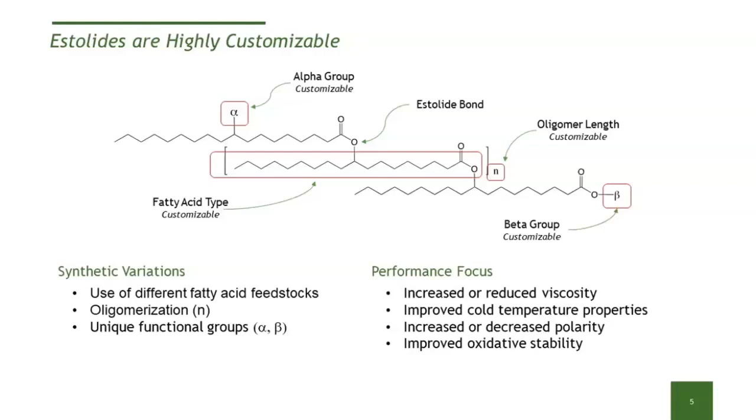So one thing we do want to think, though, is I know we're talking a lot today about lubricants, but we really view this estolide technology as a platform. We've actually developed products using our BT base oils in a number of applications, carriers and adjuvants in agriculture. Our low viscosity products we're working on as a plasticizer in plastics. Obviously, we'll talk a lot today about lubricants and the lubricant industry. We've used the BT estolide technology to replace process oils in tires and saw very good cold weather and winter type properties in those tires.

We have HX1 certification for non-food contact. We've also researched being able to use them as emulsifiers in food. And we have a personal care division that's exploring use in cosmetics, skin creams, hand creams, lotions, due to its good emolliency. And so what's nice about this is it's a platform that can leverage the technology across a wide array of industries.

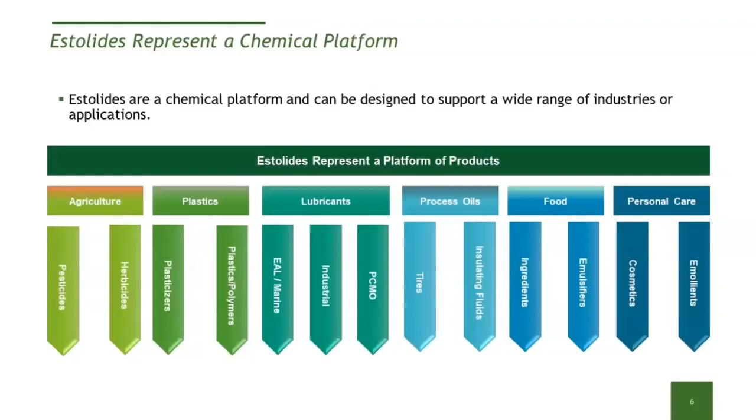The other thing we like to talk about is we have a great IP portfolio, with the focus of really protecting our customers. We want to make sure our customers are free to use our technology without a concern of being blocked by some other patent or technology. So we have patented all the way from the original raw material sources all the way down to in-product application. So the raw materials you're using, the technology, the proprietary catalysts, the processing of that, and then the end formulations. We've got about 71 patents that have been issued so that you can really operate with freedom for any of the work you're doing with our estolide technology.

So today we're talking about the base oil components for Estolides. We have three current key product offerings. We call them BT4, BT22, and BT75. This is essentially their viscosity, so from a thin material to a thick material. All have very good bio-based content. Our lowest is 68% with the BT4, all the way up to 94% with the BT75.

The reason for the change in the bio content is we're capping right now with an alcohol that's non-bio-based to improve hydrolytic stability overall. So the bigger the molecule gets, the more bio-based content, which is why the 75, which is roughly 12 to 15 chains of our fatty acid glued together, has the best bio-based content.

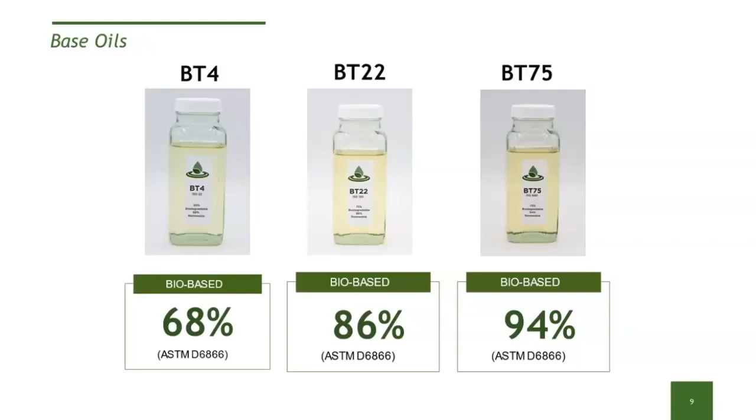Here's the general physical properties of our base oils. You can see it's roughly an ISO 22 for the lowest viscosity up to about an ISO 680 for the 75. These materials are fully blendable with each other. They're a very solvent molecule, which we'll show further in the presentation. What that means is you can easily blend the BT4 and the BT22 for ISO grades, like a 46 for a hydraulic fluid, or if you need an ISO 220 gear oil, the BT22 and the BT75 would be a perfect blend. So really you can blend to any needed viscosity from ISO 22 up to ISO 680.

Very good viscosity index for these products, almost 200 for the BT75. Our pour points for this version are usually in the minus 18 to minus 21 region. Very high flash points, very stable molecules under temperature, 240 minimum up to 270 we're usually seeing from batch to batch. We start with very low acid numbers, once again with a focus on hydrolytic stability. You have good colors, usually 1 or less for D1500 on the 4 and the 22, and usually 2 or less, and we've even had close to 1 on the BT75 as well.

One other thing to point out is that the BT4, which is a very thin material, has a very good NOACK. It's not very volatile, so if volatility is an issue in your application, the BT4 is a good choice. So John, I saw your comment there. We have worked with pour point depressants with this technology. I'll show you some of the data in our finished formulations. In general, we see okay response, maybe 3, 4, 5 degrees, but we don't see the type of response you might see with, say, group 1, 2, or 3 technology at this point.

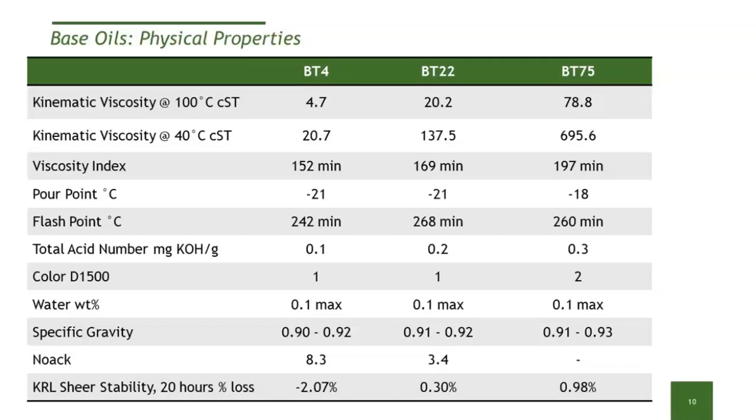From an environmental performance standpoint, we've measured the biodegradability of the molecules as well as the toxicity. The BT4 product is a readily biodegradable product. That means it's greater than 60% in a 28-day window. And once primary biodegradation is started, that actually finishes within a 10-day window at 60%. The BT22 and the BT75 are both ultimately biodegradable. The real goal here is to get to ultimately biodegradable for things like VGP and eco-label applications. You've got to be greater than 60%. Usually longer chain, higher molecular weight species like the 22 and 75 can struggle with biodegradability. As you can see, we get very good numbers for our products with the high bio content.

We've also tested all the toxicity requirements to meet LuSC list approval for eco-label and VGP type applications. We actually tested at 10 times the required limits, so instead of 100 ppm, we've done it at 1,000 ppm or milligrams per liter. And we essentially have no toxicity across all the species that are required for testing. So it's a very safe molecule if it gets in the environment, and even if it does, it doesn't stay around very long because it's very biodegradable. So very good environmental performance for our molecules.

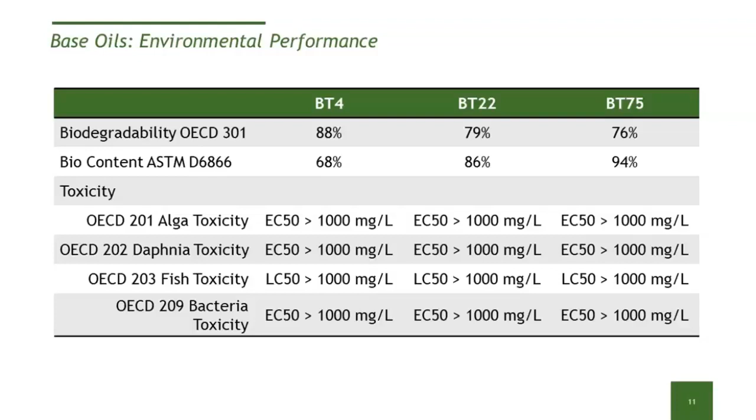We have a number of certifications and approvals, so you can use these with ease. We are TSCA approved here in the U.S. and Canada. We have REACH compliance in Europe for all the products. We're eco-label and LuSC listed. We meet bio-preferred content for a number of applications. We have food grade H1 certification, both from InS and NSF, although those companies have merged now, so it's really an NSF certification. If you need it, we have kosher, halal, non-GMO, and vegetarian certifications. So if there's something you're looking for in your product, there's a very good chance that we can deliver it due to how we produce these materials.

If there's also some other regulatory requirement that's needed for some other reason you don't see listed, there's a good chance we either have it, have started it, or we can work with you to acquire that.

So before I share performance data, I wanted to share some of the work we've done around ensuring our products are ultimately sustainable. At BT, our goal is to provide a high-level life cycle assessment to our customers for all the combinations of feedstocks and manufacturing configurations that we use to produce our products.

Just out of transparency, we are an asset-light company. We mainly partner with tollers to produce our products throughout the world. We have tolling contracts on multiple continents to do that. And what we're trying to do is create life cycle assessments with our partners all the way from the start of the growing of the oleo-derived chemistry we're using to the final product getting ready to leave the gate of our manufacturing facilities.

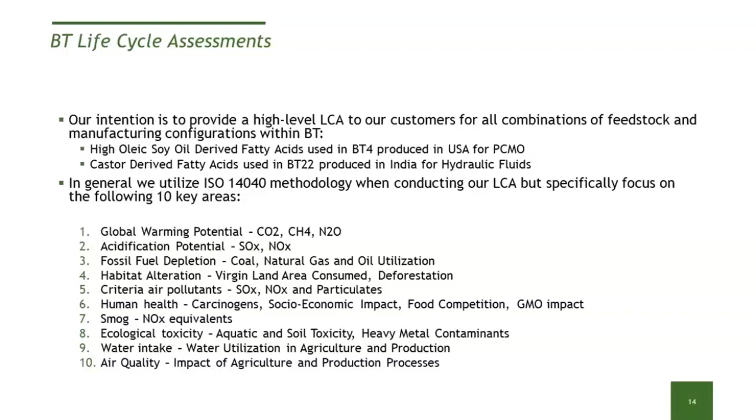And so we've done that, and the one I want to share today quickly is the castor derivative LCAs. So we partnered with Gujarat Agriculture University to look all the way from the start of the seed planting for castor products through the collection of those materials, delivery to the processing facilities, and eventually turning that into an intermediate and a final product for BT. We partnered with the Agriculture University, our Indian toller manufacturer and their research and development department, and then our team here to map that out.

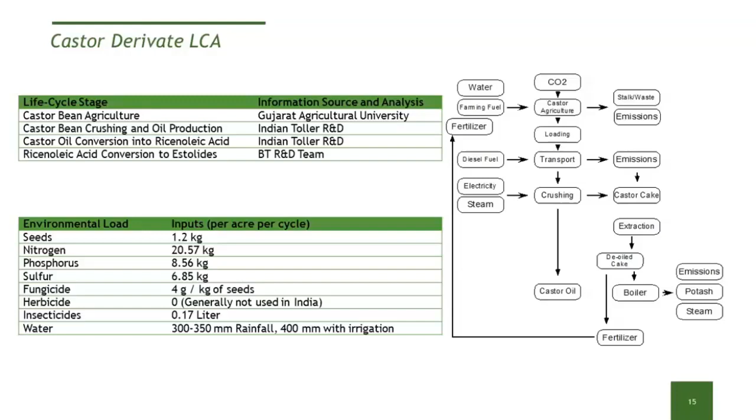We drew out essentially all the high-level inputs and outputs for these systems, and I won't go into detail, but it looks at things like how much seed you use per acre, how much nitrogen, phosphorus, sulfur is required, are you using insecticides, herbicides, what's the general yield of the castor plot, how close are they planted together, how much water is needed from irrigation, how are they harvested, how are they transported, and we went through that in this study.

And what we found from a number standpoint, when you put all that together and look at every step of this process, from the seed farming all the way to the final product, is the big impact is the land that you're using to grow castor is essentially dedicated to castor. And it's not like we're clearing a rainforest or other trees; it's really a semi-arid region of scrubland that's being turned into agricultural land. So in a lot of ways, it's a big carbon sink for CO2. So in that impact, there's a really large negative carbon uptake from that product.

And then the biggest component of that carbon is that they take the waste of the seed crushing process, so the spent meal from that castor, and it's actually what's used to drive the boilers that produce the steam for the oil refining, for the initial ricinoleic or the fat splitting, and then the ricinoleic production, and the 12-hydroxystearic, and finally our process. And so most of the carbon offset is coming from burning that CO2 that was captured and then offsetting that from the steam produced.

Now, what's nice about that, though, is we're not using any natural gas or coal or fuel oil to drive those boilers. It's just that castor meal, and so the carbon offset is minimized greatly. So from a high-level standpoint, what that really means is our product leaves our customer's facility with a net negative 9-ton carbon CO2 balance. And that allows us to actually transport our materials across oceans and still arrive with a negative carbon footprint when it arrives to our customers.

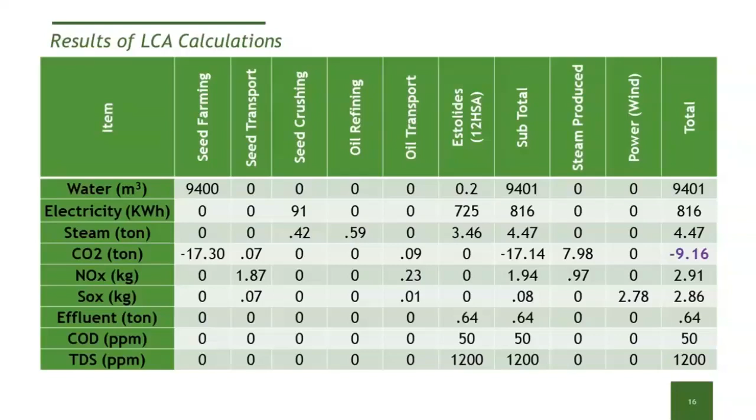So if you summarize all that impact we talked about, this is kind of what our LCA from a high level looks like. We actually visited the fields, we visited with the Castor Consortium in India, we visited the plants, we did the audit, and we really do like the overall sustainability story with castor. One is castor doesn't compete with food crops. It's really land that's not being used for anything else, and allows some of the poorest farmers to come out of poverty. Crops can be harvested multiple times.

It's done by humans, so there's low CO2 balance. There's no GMO implications. It's all naturally derived castor. You're not competing with food. And then the way it's manufactured at our manufacturing facility, by using wind turbines, boilers that use castor spent cake, and the high level of integration in that province region of India allows us to be a very sustainable and carbon negative manufactured product.

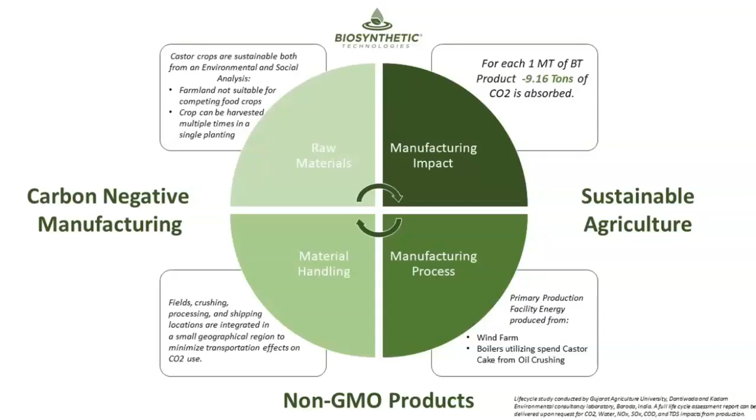We've experimented in blending with PAGs, PAOs, other esters, group 1, 2s, and 3s. And we see very, very good solvency, even with all the additive technologies. So if solvency is something that's important to you, something you need, even small treat rates of our products can help you.

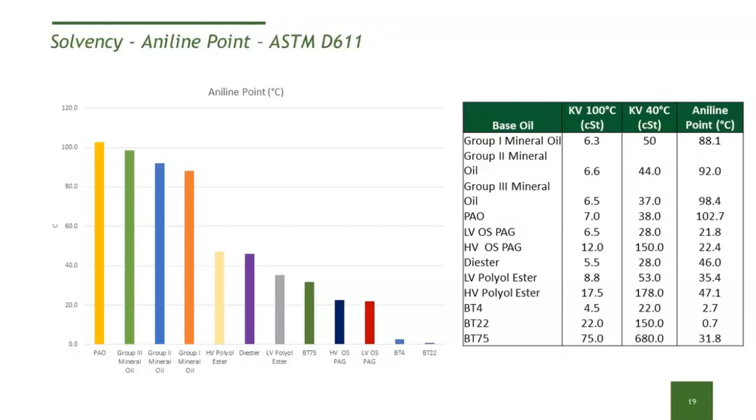The other we talked about as a key component was hydrolytic stability. We've run the Estolide on the standard ASTM D2619 test. We did modify that. It's usually a 48-hour test. We modified it out to 144 hours just so that we could show how hydrolytically stable these materials are. Normally, an ester would start to have problems at 48 hours, but we don't really see much change at 48 hours, which is why we modify it out to 144.

We compared, for example, this is our ISO 680, which, if you think about it, those are 12 to 15 chains that are glued together. So there's lots of those secondary ester bonds to attack. But even at 144 hours, we see very little change in the acidity of the water layer, 0.17. And we compared that to things like PAO and bright stocks that are traditionally very stable hydrolytically. The Estolide fares very well.

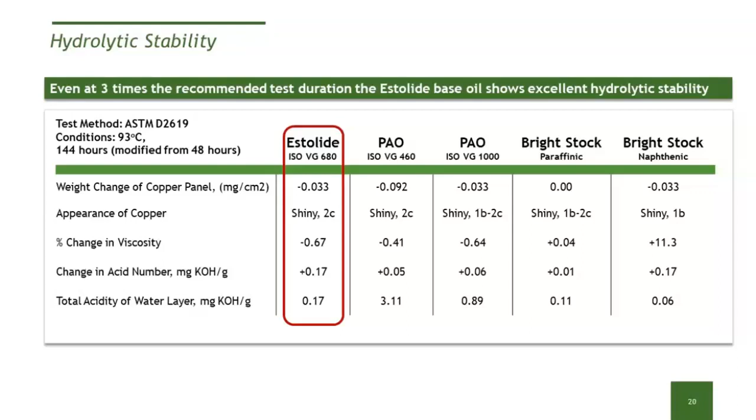But this kind of wasn't good enough for us. We really wanted to highlight how well that estolide bond affects the hydrolytic stability. So we created what we call the hydrolytic stability torture test. Here we'll take a product, we mix it with 1% water, we heat it up to 180 degrees Fahrenheit, and we stir at 500 RPM nonstop. We ran an 8-week study, and so you can kind of see what the test apparatus looks like in the picture below.

But each one of those vials is basically a test. Each week we pull. And then we looked at a number of things. We looked at our BT products. We looked at low-vis and high-vis PAGs. We looked at group 3s. We looked at low-vis and high-vis PAO. And then we looked at a whole range of esters, so complex esters, C8 polyol ester, a diester, a C18 polyol ester, and then compared the results.

As expected, the low-vis, high-vis PAGs, the group 3s, low-vis and high-vis PAO, they're essentially a flat line. There's almost no change in TAN with time, and they really never come off the ground. Whereas the esters, you can see here, I have pointed out as traditional esters, they rise very rapidly in these types of conditions. You're getting the hydrolytic cleavage of that primary ester bond. You see a really rapid increase in the TAN.

The BT products, the 4, 22, and 75, they essentially stay flat all the way out to week 4, and then finally at week 8, we saw kind of the first rise in TAN up to about a 0.7 to 1, which is still a relatively good number for TAN. And so it just kind of shows from an order of magnitude how much better those secondary esters are from a hydrolytic stability.

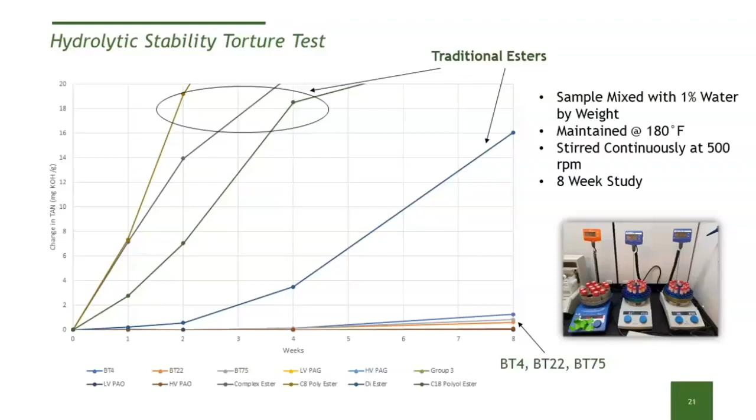Did a similar test. We used the RPVOT test methodology here, the ASTM D2272, to look at oxidative stability of the products against the same class of molecules. And once again, what you see is our products, when you mix it with a 0.5% phenolic, 0.5% aminic treat rate antioxidant, performs similar to what you get from like a group 3 or a low-vis PAO, and dramatically better than what you get from kind of low-vis, high-vis PAGs, high-vis PAOs, and most of the ester classes.

So once again, really kind of best-in-class oxidative stability. And this is achieved through us using fully saturated materials. There are no double bonds that would impact the capability of that oxidative stability.

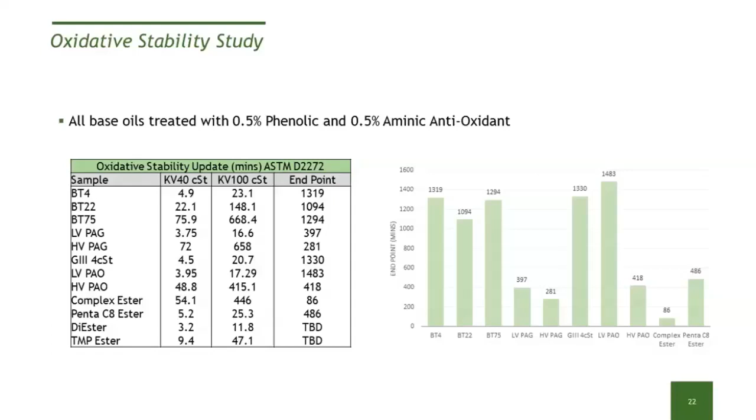So next, I want to talk a little bit about some of our prototype formulations. And what we're doing here at BT, just want to remind everybody, is our goal is to be a supplier of base oils and additives out to the lubricant industry. The only reason we're really making finished formulations here is just to highlight how well our technology works. And we want to do this in a range of applications from gear oils, hydraulic fluids, PCMO, grease, and metalworking fluid data, which we'll talk about.

But once again, and as a small caveat to that, we are currently selling GF5 certified PCMO that was made using our Estolide technology with high oleic soy oil that is available for sale. But our end goal there is really to partner or license that technology with a finished fluid formulator, not to be in a business selling motor oil ourselves. And so hopefully, what we're trying to do here is prove to you the technology works in final formulations and maybe help speed you to a use of the technology down the road.

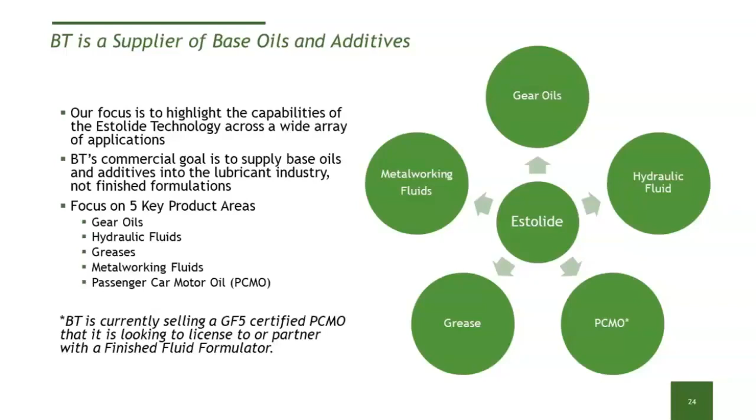So first up is gear oils. The first is an ISO 220 gear oil we made, eco-label compliant. This used essentially 100% of the Estolide technology, so it was a blend of our BT75 and the BT22, so about 30% and 67%. Pour point, as expected, was around that -20, -21 that we normally see. We got a very good VI on the product. Once again, like to point out, even with the additive pack, a very high flash point for this type of oil, so very low volatility.

We see this in the BT products. They tend to impart very good wear, so a very low 4-ball wear scar with only 0.32. Was also having a relatively good weld load. So the last weld point was 315 kilograms. We did rust testing, which is sometimes an issue with these components, and saw really good results. You kind of see what the gear oil looks like here. The color is actually pretty good for gear oil.

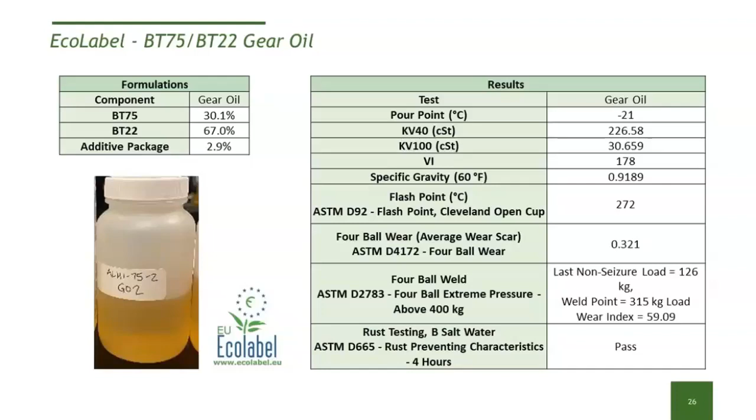Then, once we felt like we had a relatively good gear oil, we took it out and compared it to some of the DIN and China GB specs, as well as some commercial gear oil products of the same ISO 220 grade out on the market, and ran it through the test points. And so some key points to highlight is, once again, you see the low TAN of our product starting, which is always good. We had similar flash points.

Our pour points were a little bit higher, in the -20s versus kind of the -30s you see. But this is where we do see some of the problems that we talk about here. If you look at the rust performance, one of the commercial products did not pass when we ran it multiple times, whereas we got a good pass on the rust.

Demulsibility, remember, this is one area we focused on heavily with our products, and so we really got the best demulsibility compared to the commercial products. You see we had zero rag layer. There's some in the commercial A product, and the commercial B product actually did not pass demulsibility. Sometimes you see this with bio-based products as well.

For foam, here we ran the Flender foam test. We were able to pass. Commercial B passed quite well. So you can see the commercial A had some as well. And once again, oxidative stability, we had the lowest measured value here, which we expect as well. So a very good oxidative stability result for this material.

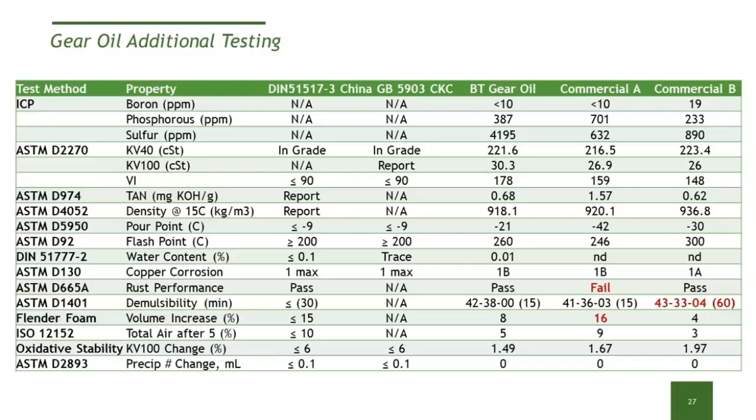So what you can see is the things that we were really focusing on, hydrolytic stability, oxidative stability, demulsibility, seem to pan out, especially compared to the commercial products on the market. So we're really happy with the performance we're seeing from these gear oils. And it's fully eco-label compliant. All the components are LuSC-listed components. And so you could use this for a number of good applications.

We then once again put it through some initial testing and compared it with some of the GC-LB specifications out there. So color was a light tan color, a good 4-ball wear, a very good coefficient of friction, very good worked penetration of 276. We were targeting an NLGI grade 2 grease, which we did produce. Good dropping points from the material. You see the 4-ball wear 0.42.

Once again, that's similar to what we see with most of our products, because the Estolide, we believe, seems to have an ability to impart good wear protection and load carrying capability onto the fluids it's used in. Low temperature viscosity came in where we would expect, usually -21 to -25. We got a -23. Oxidation time to exotherm, this would be expected. These are very oxidatively stable. And the weld pressure load topped out around 315, which once again we saw with similar data for our gear oil.

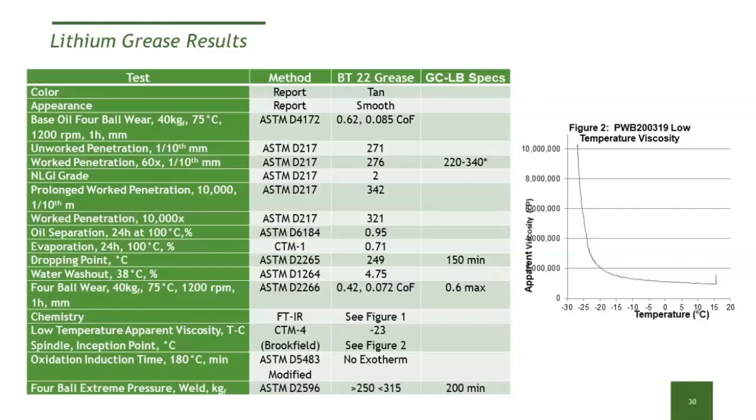All right, next, moving on to hydraulic fluids with the BT products. The focus of our hydraulic platform was really to understand and to prove that we play well with other base fluid technologies. Earlier in the presentation, I talked a lot about the solvency of the Estolide product, so very low aniline points, which means it blends well. We just wanted to highlight that we do blend well with other components, and that we can actually take on some of the properties of those component blends.

So our first hydraulic formulation was an ISO 46 that was done with a PAO blend. Here we used the BT22 product at about 68% and then a PAO 2 centistoke. The reason we chose PAO 2 was, once again, to show the blending capability, but also to keep the biodegradability of the overall end product.

And as you see, because of the good pour point on the PAO2, it did improve the overall pour point, even though we're using a high relative amount of that BT22 product at almost 68, 69%. So we got a minus 32. Very good VI, which we normally see.

Flash point here, you saw a dramatic reduction in the flash point because of that high volatility of that PAO2 compound. But it actually brought the volatility up quite a bit from what you see with just, say, like a PAO2 product. As expected, a very good oxidative stability of about 823 minutes for end of test hard break.

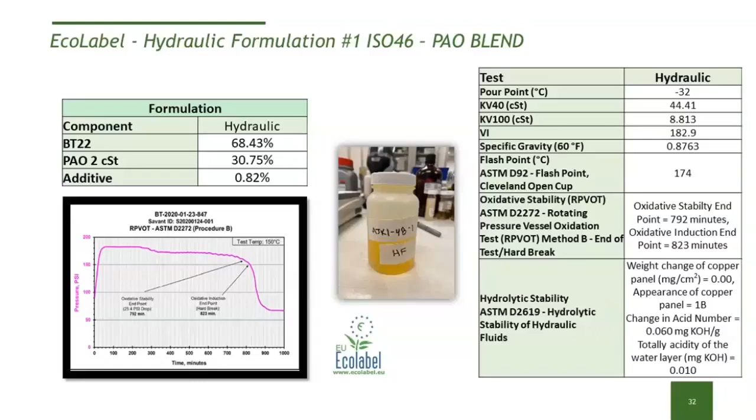Now, kind of complementing that is we also made a VGP compliant hydraulic formulation. And so the way we did this is we actually used our BT22 product with a 4 centistoke group 3 product. And this, because it was 4 centistoke, we actually used more than we did, say, of the PAO. It's 59%. We were about 40% of the overall formulation.

Now, you think that might have some issues around maybe toxicity or biodegradability, but what we found here is that our estolides imparted really still very good biodegradation ecotoxicity performance. So we reran the OECD 301B and got 75% for the overall biodegradability, which we thought was excellent. Once again, to be VGP compliant, you need to be above 60%.

And then we ran the OECD 201, 202, 203 tests, 100 ppm as required by VGP and Ecolabel. They were all found to be not acutely toxic, which once again, a great result. So really good environmental performance with this formulation.

We also ran kind of the standard performance data that you would expect, like we were showing in previous data. Pour point of minus 26, so kind of what you normally see with, say, a group 3, and once again, our component, not unexpected. Good flash point, really good color, once again, less than 1. We ran, obviously, corrosion testing, passed no problem there.

Rust testing, no issues. We ran hydrolytic stability, very good numbers. Demulsibility, once again, 40-40, no rag layer, passed in 15 minutes. 0 foam issues. 4-ball wear of about 0.41, a little bit higher. Once again, we're not using as much BT22 and normal load. And the weld load was a little bit lower at 160.

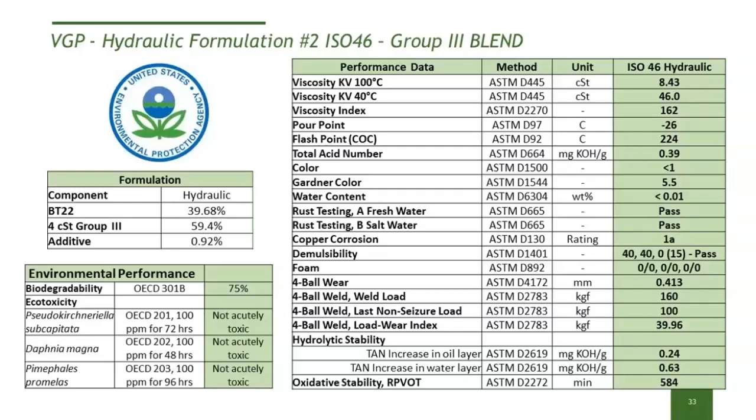So next up is a passenger car motor oil. And we actually have 2 API certified GF5 motor oils. One's a 5W30 product, and a 5W20. These contain roughly 35% of our estolide technology. In the case of our PCMO, this is a technology built around our high oleic soy oil. So it's high oleic soy oil derived estolides that we use to produce this.

And once again, the things that we like about this when working with motor oil is the good VI, and we talked about that solvency, the low aniline point. So it imparts a lot of good natural detergency and solvency to keep the engines clean, and that kind of shows itself well in the data. You can kind of see the results from a field trial we'll talk about below, but it talks about the good cleanliness and solvency that the estolide imparts from a motor oil perspective.

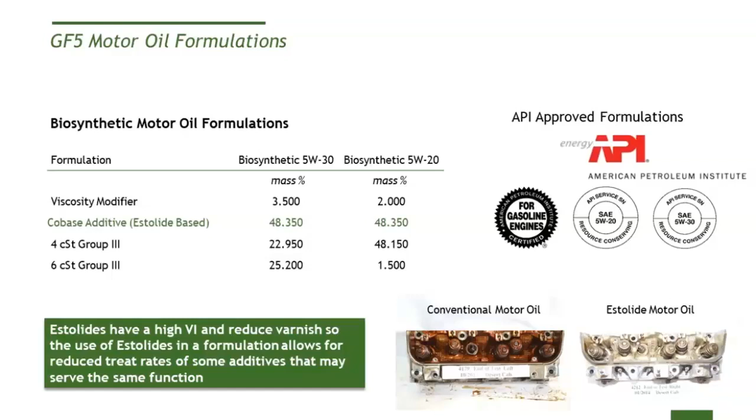So once again, just wanted to clarify, so we are selling this product as a commercial product, but we're really looking for a partner that would love to license or partner with us to create these finished formulations, especially when it comes to now the GF6 motor oils that are coming online now, which we'll talk about here in a second.

So first up, just kind of the general analysis of what we saw with our 5W30 motor oil. You can see the KV 100. It was designed to be a 5W30. Passed CCS and MRV with really no problem at all.

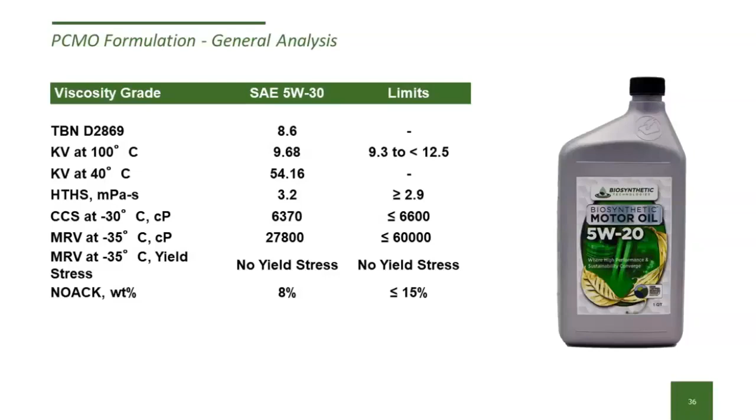With the pour point being minus 23 or so, sometimes there's concern, but once again, we saw no issue with our products with the low temperature properties. And that 8% NOACK, that's once again being driven by that low volatility that we see with that Estolide technology. We did do the full sequence testing required to get the API certification.

The sequence 3G here, once again, you see that weighted piston deposit, which shows that good cleanliness capability, good solvency capability of that Estolide in the formulation. The bio content comes in around 29%, which allows us to meet the USDA BioPreferred metric, that's a 25% requirement in motor oil. So this is a USDA BioPreferred certified engine oil.

And then we have the rest of the 4A and the other sequence tests, and we're happy to share this afterwards if you have interest. What was nice is we actually passed all of the sequence testing first time through with our Estolide formulation, which once again highlights, I think, how well the Estolide technology can perform, even in a demanding application like passenger car motor oil.

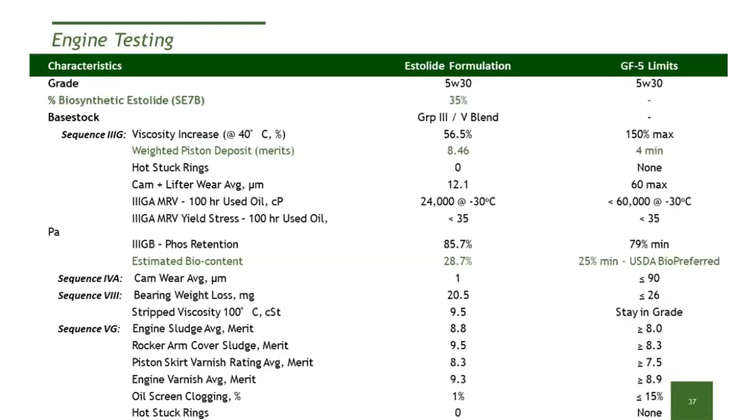To also demonstrate the capability, we ran a field trial with our PCMO out in the Las Vegas, Nevada desert. We used a taxi cab fleet out there, so stop and go in desert conditions was about as bad as we could think, and that's what we wanted to put it through. We ran the test for about 150,000 miles. We ran one taxi cab on a conventional motor oil, and the other on our 5W20 certified Estolide motor oil. And then we took those engines and actually had them cut up.

We actually usually have an exhibit when we're at STLE. So next time we're able to get together in person, please stop by our booth and I'll show you that engine in person. I would love nothing more than to be able to do that instead of virtually, but the pictures will have to suffice today.

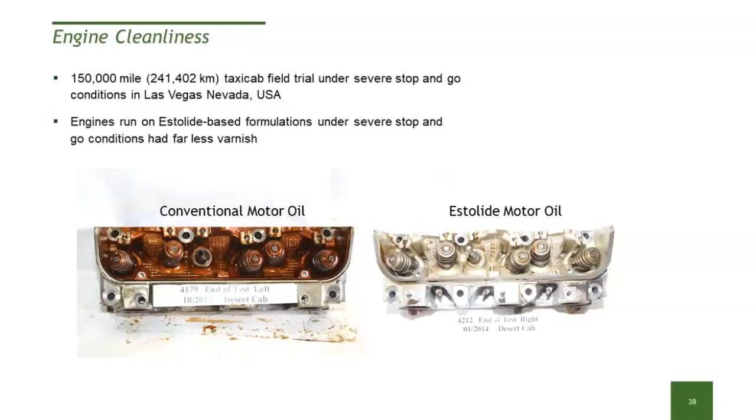You can clearly see the difference. Here's the conventional motor oil, the varnish that deposits a little over time. Once again, that good solvency from the Estolide really keeps that engine nice and clean looking, which I think highlights the technology well. We are working on a GF6 motor oil as we speak.

We're trying to find a partner to do this with us. Once again, we don't want to be a finished formulator for these products. We have blended using our new BT4 technology down to 0W20. We have a 0W20 and a 5W30 blend for GF6. We've done some of the initial bench testing, are getting ready to start engine testing, and eventually get our GF6 certification for our motor oil.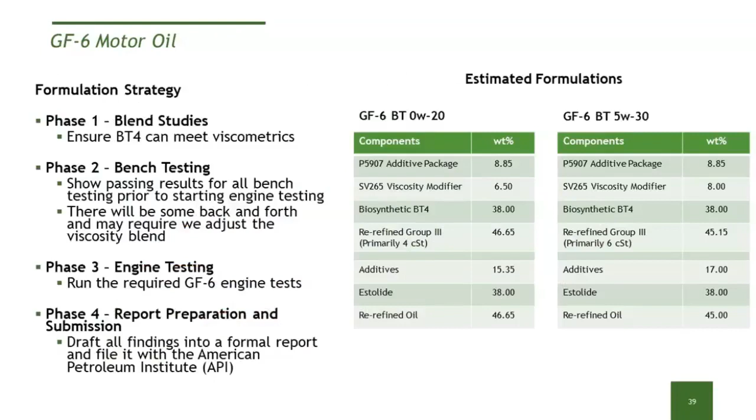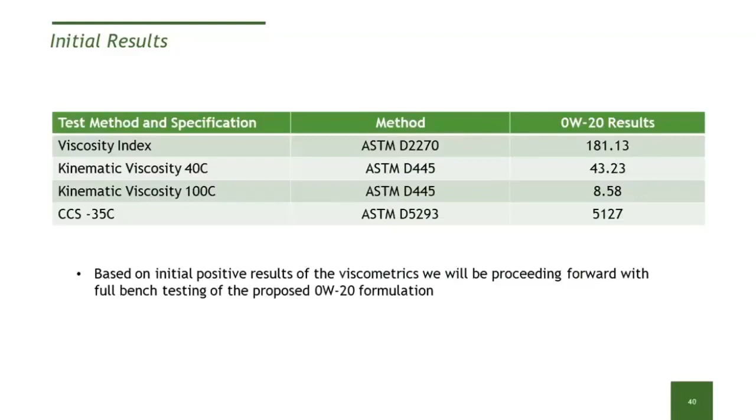We have some initial results around, obviously, viscosity and CCS. Everything's looking very good for us to be able to meet the 0W20. And that's really being driven by the new BT4 technology. The original technology to get the 5W20 and 5W30 was actually a 6 cSt product. Our research with this new BT4 product allowed us to go lower to the 0W20, and I think that's really exciting.

So next up, I'll talk a little bit about metalworking. But before I get too far into metalworking, one thing that we realize is sometimes metalworking has different requirements than some of the traditional base fluids in other industrial applications like gear oils, greases, hydraulic fluids, like we talked about. So we've retailored our Estolide technology to make effective additives for the metalworking fluid. We call this the Biocea line.

It's derived from castor type materials, which is where the name is derived from. Each one of these additives is designed to tackle different areas in the metalworking application. Our Biocea 1 is focused around cutting and grinding applications. Our Biocea 2 is more around general machining, whereas our Biocea 3 is really around forming type applications. We started to do some early benchmarking against traditional competitors in this space, like pentaerythritol esters, synthetic esters, TMPTO, and maybe even castor derivatives.

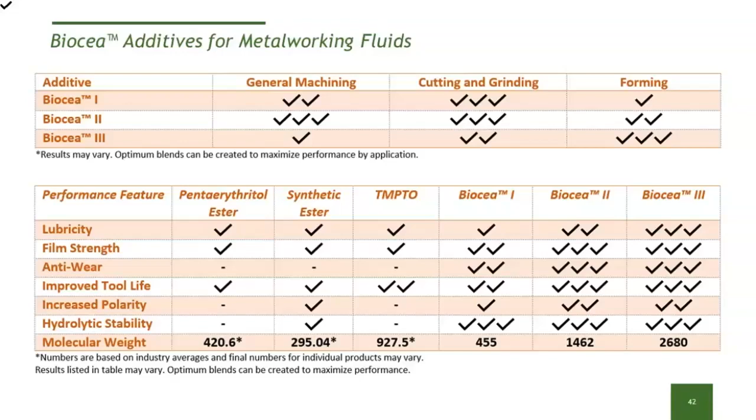And you can see the rough molecular weight for these molecules. We've just recently developed these additive technologies. We've done a little bit of testing, and this is the first data that we get to share. The big one here is a twist compression test. And what you see, compared to the traditional bio-based stocks used in metalworking, especially the Biocea 3, designed for a higher polarity type environment, it just did phenomenal.

It's one of the best tests they've seen from a twist compression standpoint. Kind of essentially world-class performance of that Estolide technology that we've developed. We're going to continue to develop more in the metalworking space. We've recently brought on a new formulator and researcher and commercial guy in the metal space, Jeff Mackey. We're excited to have him on board and he can develop this space for us, so look for more exciting things to come in the metalworking application space.

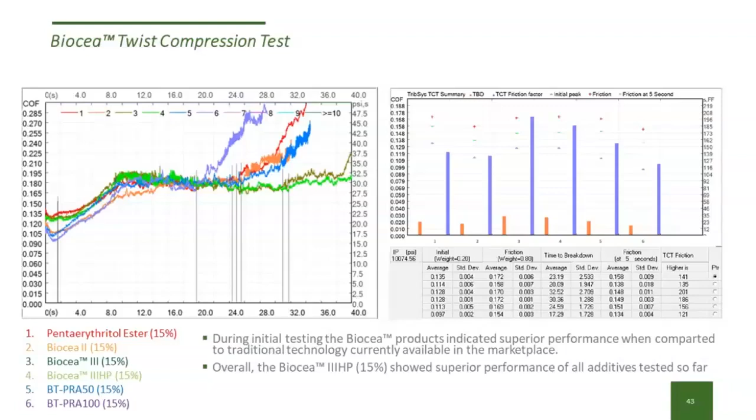One last thing I'd love to highlight is that we are starting to branch out into a larger portfolio of products that we can offer our customers. We have the Estolide base oil technology, we have the Biocea additive technology line. We're now working with our Indian partners to be able to offer more specialty castor derivatives in the marketplace. And so we now have an additional, I think, 7 products that we're bringing online. These are polyricinoleic acids, acid values from 30 all the way out to 100.

We have a diethylhexyl sebacate molecule, which is a very low pour diester. So it's got a minus 70 pour point. And so if you need applications where pour point is really good and still have the bio content, this is a molecule that we can deliver to you. Bis hydroxyl and disodium sebacate, other additives used in the metalworking space.

I did see a question just pop up. Someone asked, are these group 5 base oils? Traditionally you would think of esters in a group 5 space, but because of some of the technology we're employing, we're actually working with API right now; we meet the qualifications of a group 3 as well. So around sulfur content, around overall saturate level, around VI limits. And so they meet all the requirements of a group 3 so that we might be able to get a good read across from our GF5 to our GF6 for those base oil components. Just answering your question that popped up. I'd be happy to talk more about that.

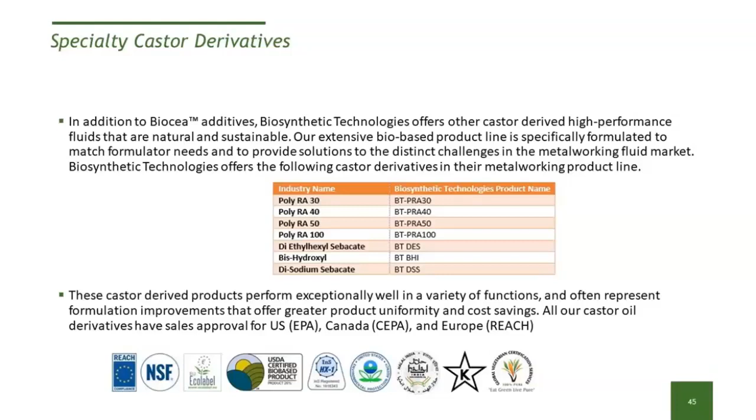Also on the specialty castor derivatives, I just want to show a little bit of data on our poly-RA50. We ran twist compression and 4-ball wear, and we've compared it to some of the other products you'd use in the metalworking space: chlorinated paraffins, polymeric esters, and sulfurized esters. And once again, you see the poly-RA product that we're manufacturing has really good, kind of best-in-class twist compression compared to the other products. And the 4-ball wear is quite low, very similar to what you'd see with a sulfurized ester, around 0.7, so much better than a chlorinated paraffin and the polymeric esters out there. Once again, these were used at 15% concentration rates from a dilution standpoint.

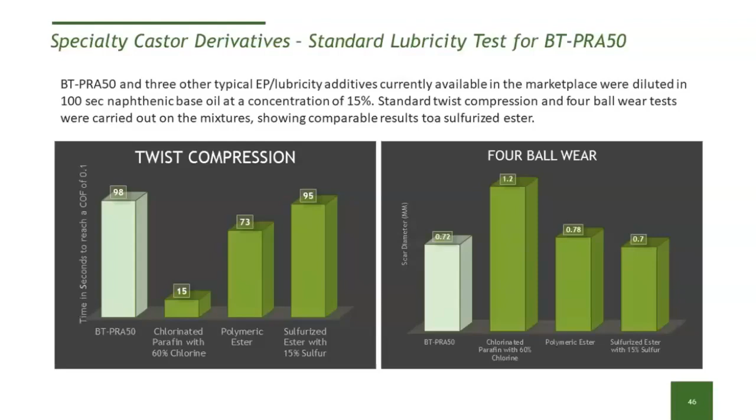And you'll see more of this to come as we keep on working on our metalworking and additive technology. But once again, just to repeat, our goal is to supply these materials as additives to the metalworking industry. So the metalworking fluid formulators, we want to partner with them to sell these. We are not entering the metalworking finished lubricant space. We just want to be a supplier and additive manufacturer for these components. All right, so that gets to the end of my overall performance data discussion. I think I had to leave about 15 minutes for questions, so I think I did okay there.